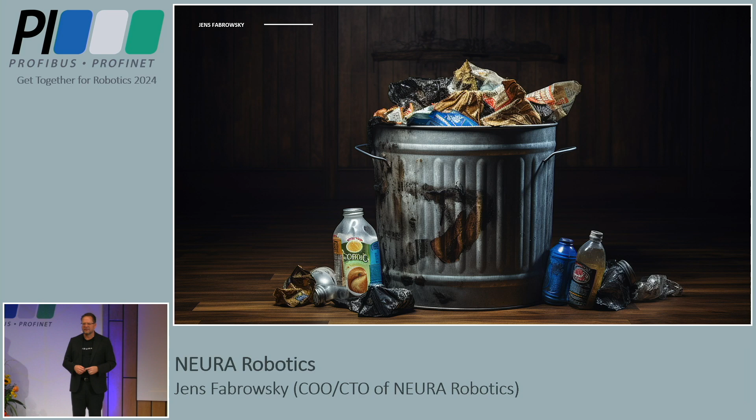So, nevertheless, always in the evening I also have another task at home. You might know this: I have to bring out the garbage. Have you ever asked ChatGPT to bring out the garbage? What do you think happens? I'm a bit limited in time, so I don't ask it live, I have a slide. ChatGPT can't do physical stuff. You might have a funny difference between German and English. If you ask in German, you get below that an explanation on how to separate the garbage. In English, it just ends there.

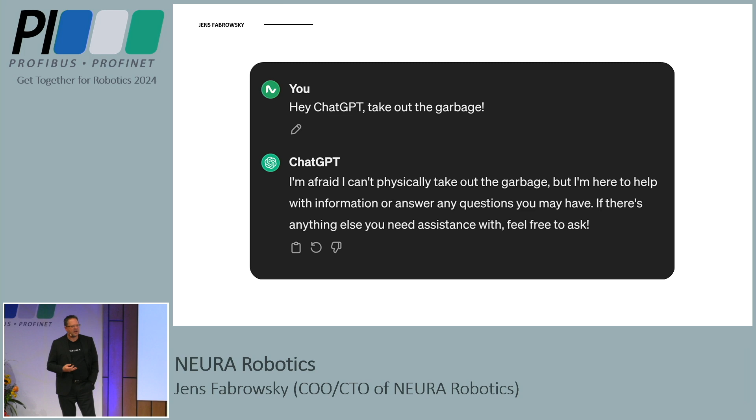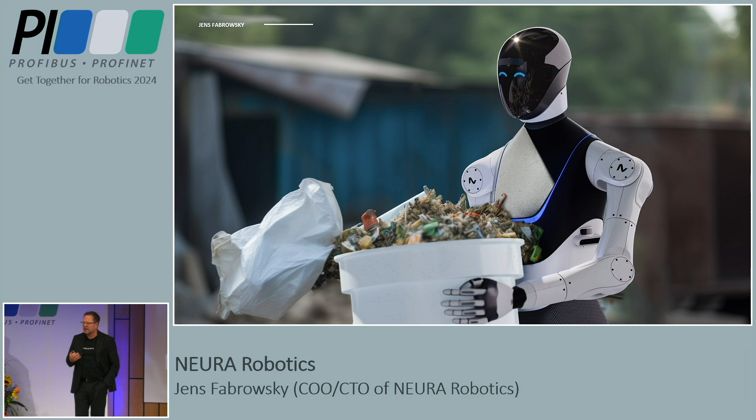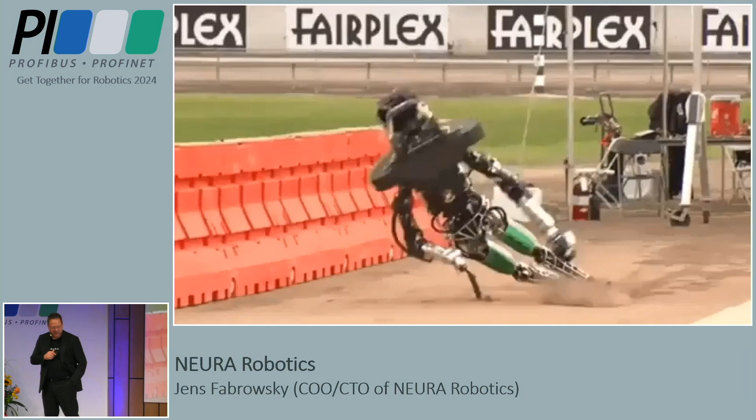So the vision is, of course, we can do things that we all don't like to do, or where it supports us to do stuff. But it's not working so super yet. I can probably watch these YouTube videos for hours.

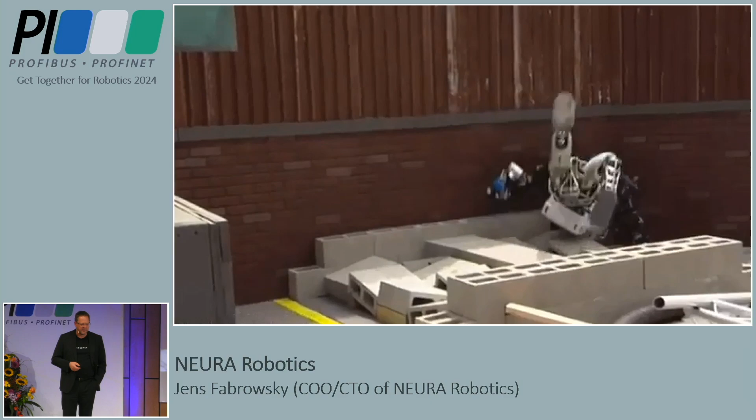Still some meters to go to get these humanoids really around us. You see a lot of videos where things can do something, but if you're in real life, well, it's difficult. Nevertheless, it will happen for sure, and it will change our world.

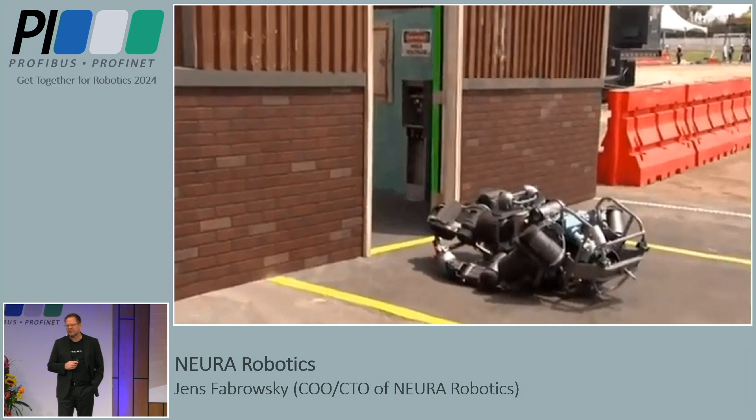And we all know Elon Musk. He's always quite a bit early on what comes next and what is the next big thing. He's even stating a vision that Tesla will become a 25 trillion dollar company, just because of robots. And if you compare it, that would be half of the value of the S&P 500, just by moving a company into a field that for this company is technically reachable.

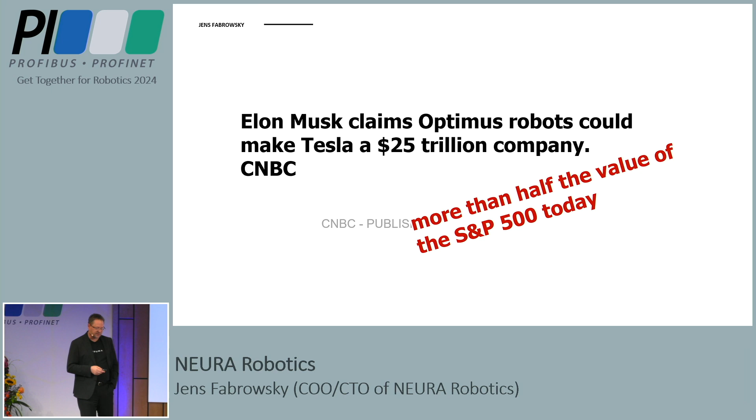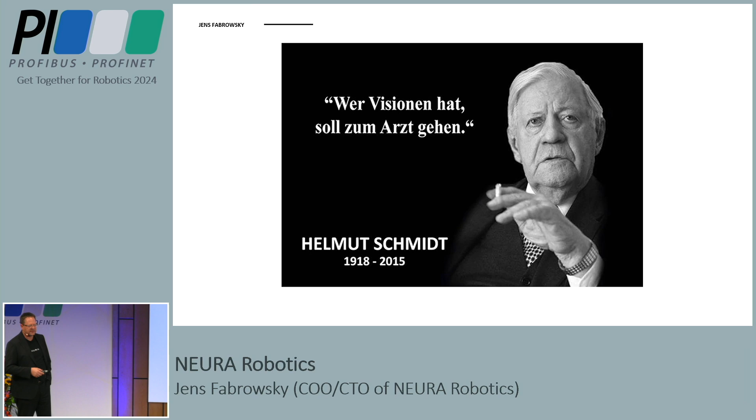So, but visions - for us as Germans, it's always a bit difficult. Probably most of you know this quote. I don't have the English translation, but it basically says who has a vision should go see a doctor. But we have to have visions, otherwise we will end up somewhere in a museum. The world around us changes, and we are a bit slow and a bit late.

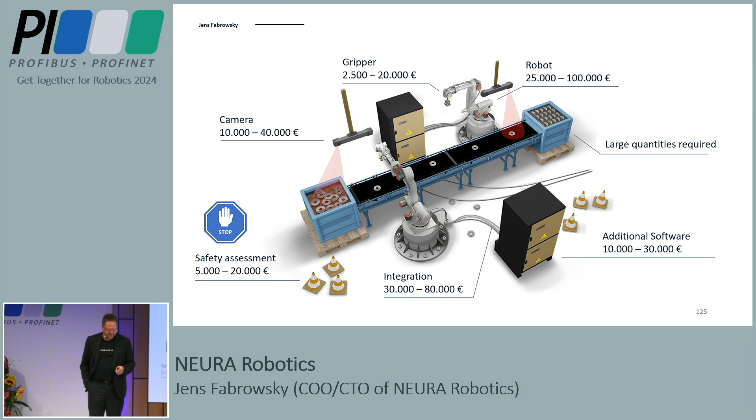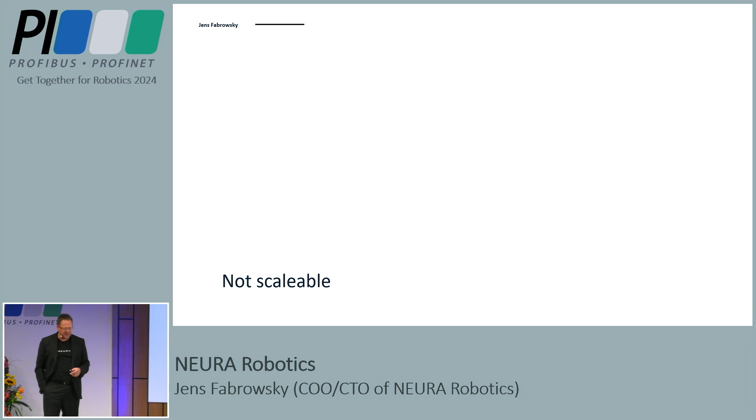Is it the smartest solution? Well, not really. It's not really scalable. We all know these challenges on vision - lighting has to be somehow always the same. Is it cost efficient? Also not really. It needs skilled workers, at least for programming. It's not really safe in the environment. It's not flexible, it's complex. So it's not fully autonomous.

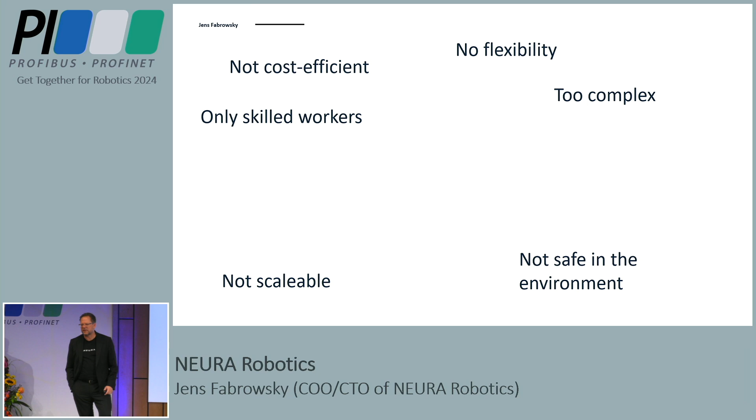So if you remove the box on the left-hand side and put something else there, same task, do it from unsorted to sorted - doesn't work. We need to put our hand to it. So it's not fully autonomous.

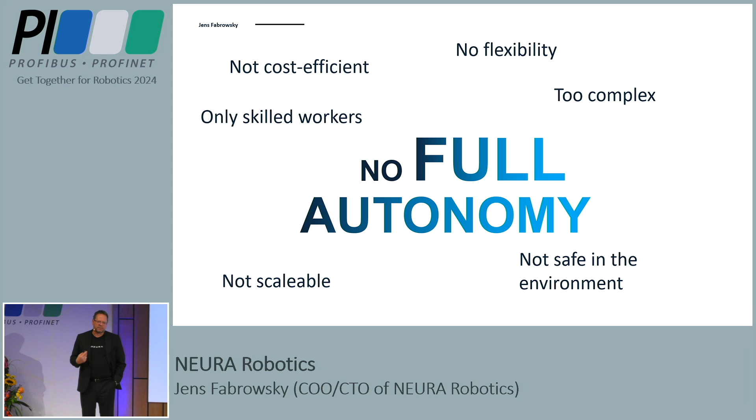What do we bring to the robot? What is, let's say, the secret of Neura? The secret of Neura is something to bring cognitive skills to a robot. Something we all know - we know it at least from our own childhood, but we know it also from our kids. We perceive the environment, we understand something, we start an intuitive and safe action, and we don't do this again, or we do it again depending on what we have learned.

What is the best example? Every kid probably has to touch the oven once to find out, damn, this is hot. This makes I don't do this again. Loop is closed. If you do this to a robot, then you can do a lot of stuff.

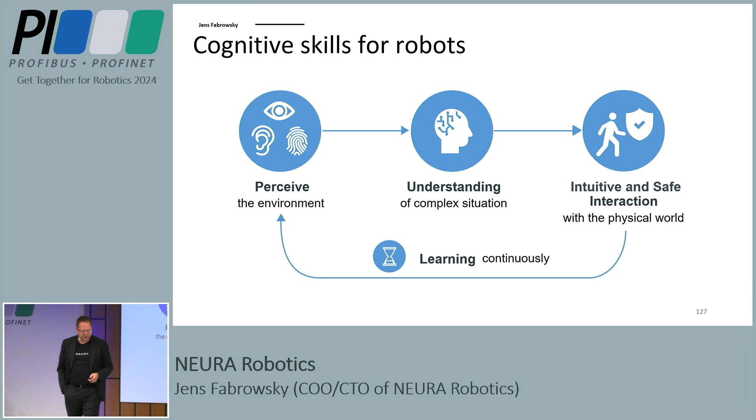That is what we have in our portfolio. This is what we call our MAiRA. It's the first cognitive robot in the world. What did we bring to it? We brought sensors to it, we brought eyes, a 3D camera.

We brought ears, a 360 degree microphone array. And we brought feeling to it with force torque sensors and some other secrets that we do to it, so you can do stuff like a human being. I will show you in a video.

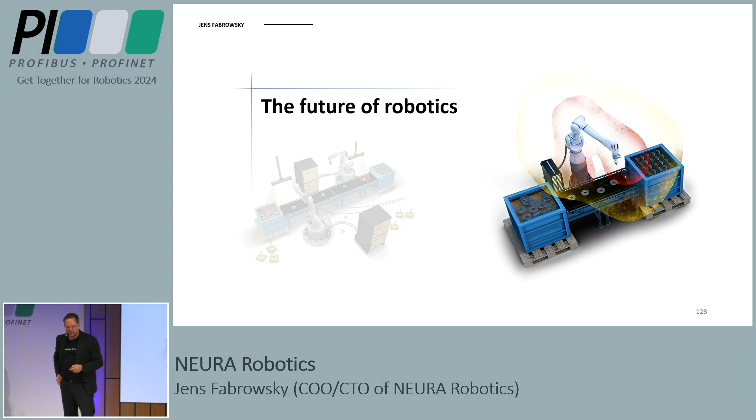And if you do this in a logical row, you get a portfolio of things that happen in a physically, absolutely logical way - like an evolution, but the evolution is way faster than from this wooden wheel to the Porsche, because it's already happening in our portfolio.

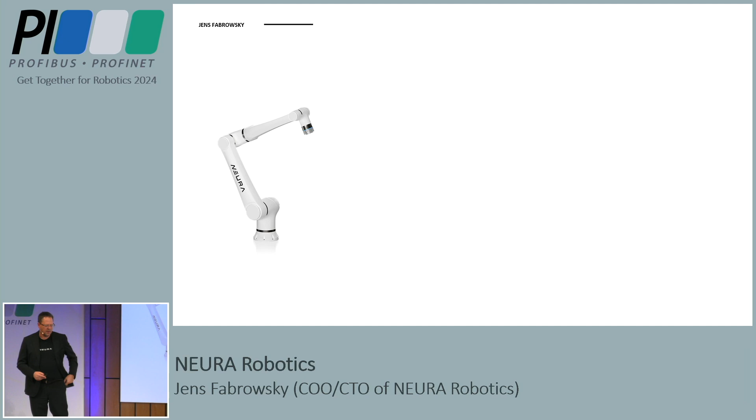So on the left-hand side, you see our Lara. It's a typical collaborative robot, and then I put some sensors to it, and it becomes a cognitive robot. That's our MAiRA, having a camera, having the 360 degree microphone array, having the force torque sensor, having some human detection to it. So you find out now, wow, I can sense something and I can do something, and it has AI on the edge, not in the cloud - on the edge.

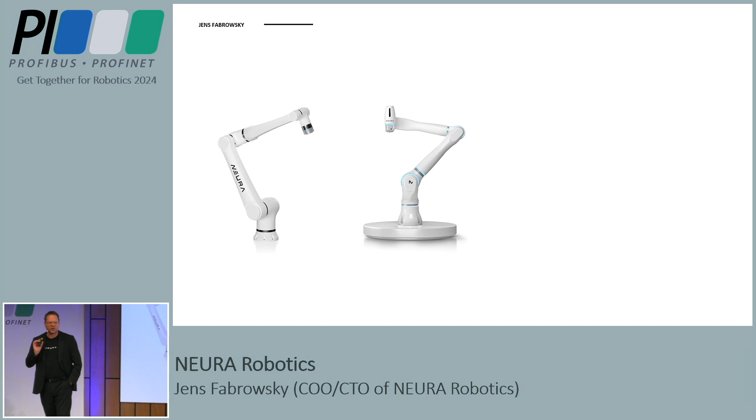Now I put some wheels below that, and then you would say, wow, it's a shelf on wheels. What can I do with that? Of course, you can go where the task is. You can then do the stuff there, so the robot can already move to the task.

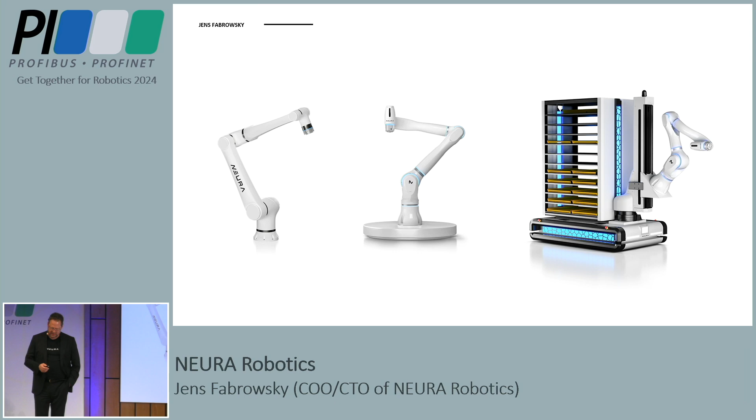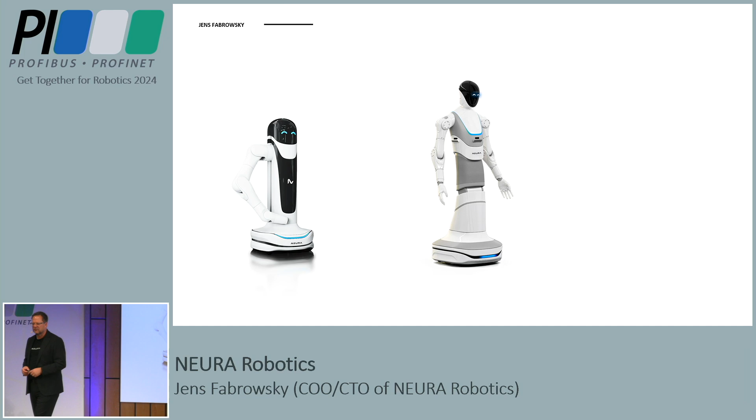Giving it a little bit of a different shape, it's still the same rolling platform. If you look at the arm, it's still something that looks like an industrial arm, and you put the sensors somehow in a body that looks a little bit more like a human being. You're coming closer to what could be a humanoid. Well, this is just above the waist, the humanoid. Below it's still the same, and then you finally end up at our 4NE-1 - that's our humanoid robot, which makes us the first manufacturer of a humanoid robot in the world, in Germany, sorry.

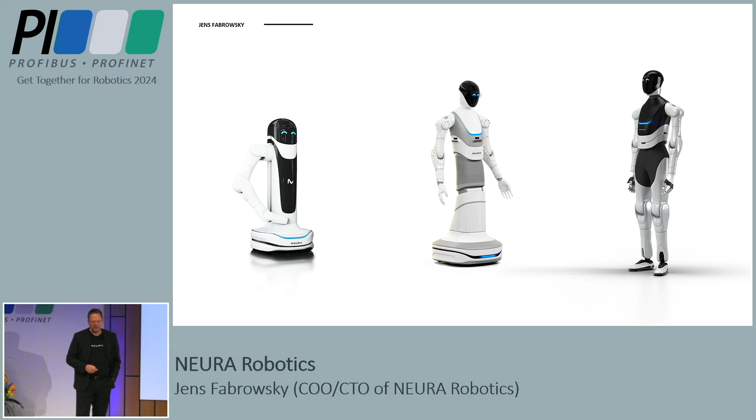Well, I was flipping pretty fast through our portfolio. We are a 5-year-old company and we have a portfolio like this. That's not typical for a startup. Why is it? Because it's all platform-based. If you look into our drives, our secret, you would find out that somehow they look equal.

Well, it's a toolbox of drives. If you look into the combinations in the platform, you would find out it's just a clever combination of stuff where you put intelligence, where you put wheels on the intelligence, and you can do things to it. And there's some other thing to it - I mean, guess what, you all have such a smartphone.

The ones in this group that are a little bit older know that before that smartphone, there were other smartphones. They were not so bad, but they all had one big issue: there was no open technology platform. At the time, you could buy a Palm that was talking perfectly to your Microsoft computer. Unfortunately, you couldn't buy an app, or it was horribly expensive.

So what was the magic to that? Technology platform with an app. That's basically the same that we have. We have a technology platform. Each and everything is basically working on the same software architecture, having a safety layer, having a layer in the middle that basically keeps us somehow communicating with the software that should do something, and on top we have apps. And guess what, you can transfer that from one robot to the other, and it learns by itself.

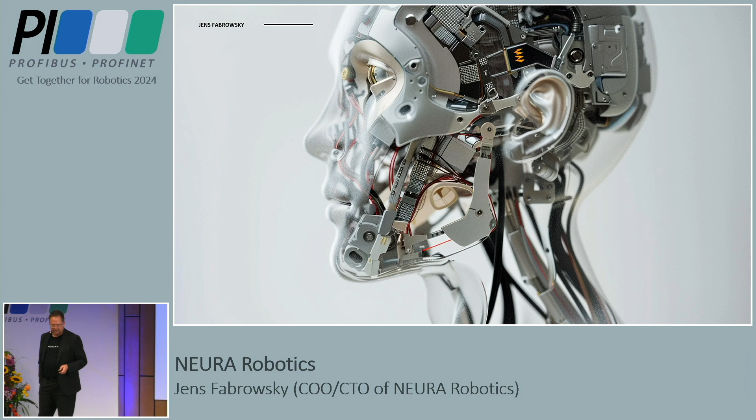That brings us a bit more to humanity. Well, let's look into one short movie just to have a bit of an overview.

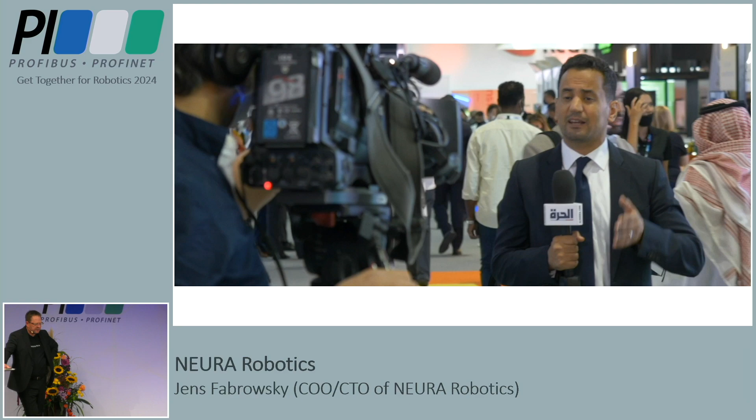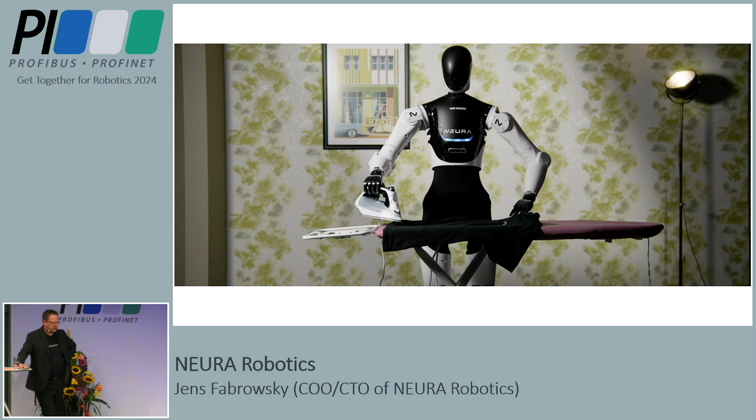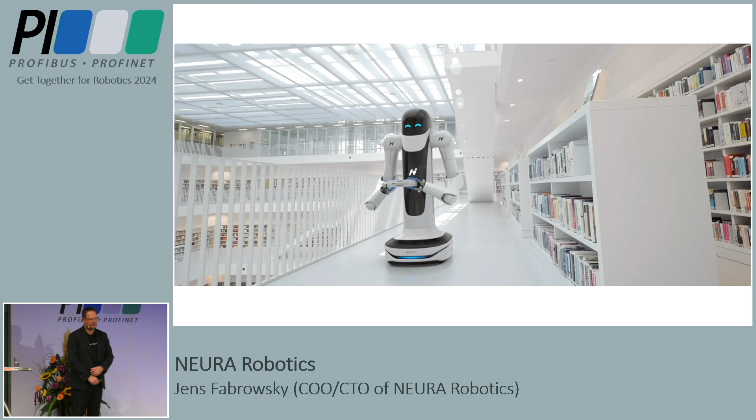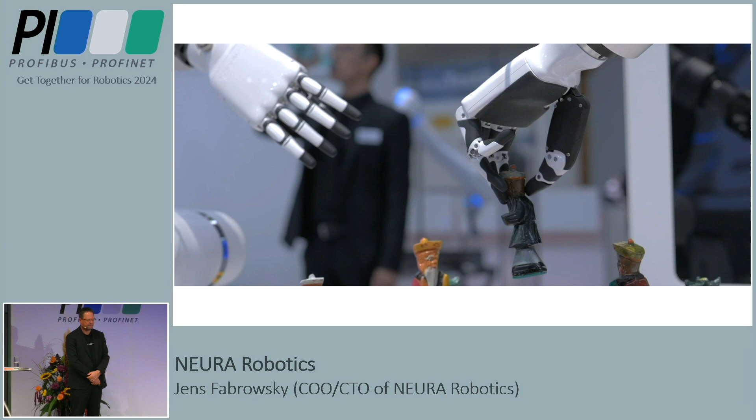We are here to create the future, a good future, where our technologies assist humans. My great vision is making robots being an accessory for every human, in every home, in everyday's lives. Are you ready? All the last big things were actually created by a need. Our aim is to bring our technology together with their solutions to create even better solutions for mankind. The goal of Neura is what a company brings to the world, the impact. Being more like a technology provider, platform provider for every company in the world one day. Just giving the next step to advance humanity, that's, I think, one of the biggest goals.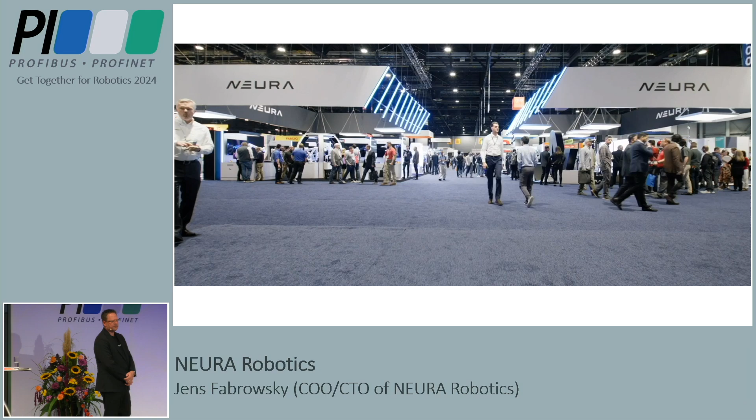So now, I mean, you were obviously talking a lot about robots. Let me talk a little bit about humanoids and why it works, and why it will work easy and fast.

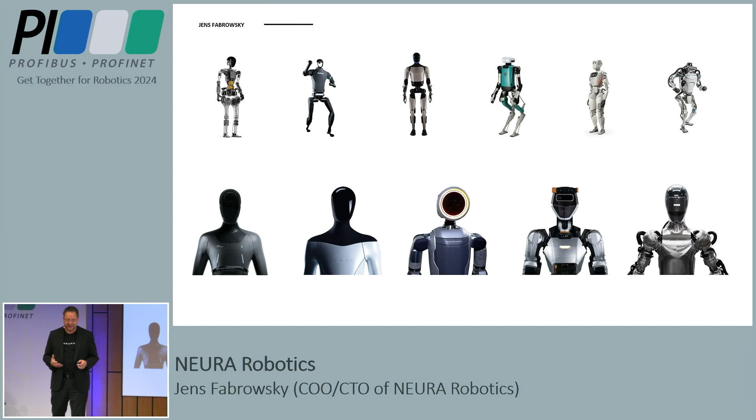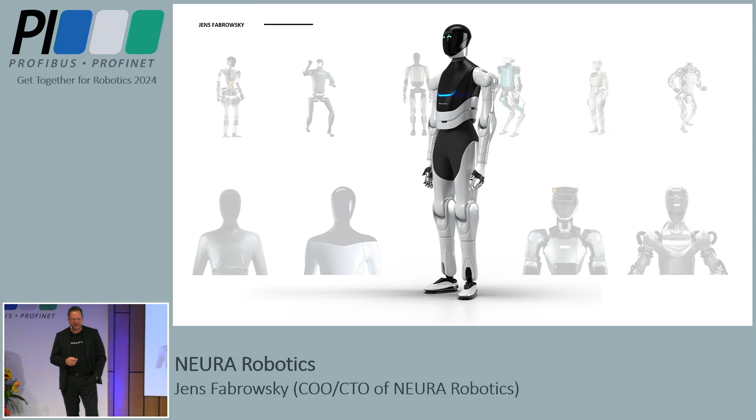Well, we talk about our 4NE-1. 4NE-1 is our platform on humanoid robots. Of course, it looks like this, this is basically the one that we are having at the current status in manufacturing. And it can do things, and that's the idea. It can do things that relieve you from timely tasks, to give you a bit more time to do other stuff. But now let's do the transfer.

Let's do the transfer from why we learn with each and every pick, each and every task that we do with an industrial robot, into a humanoid.

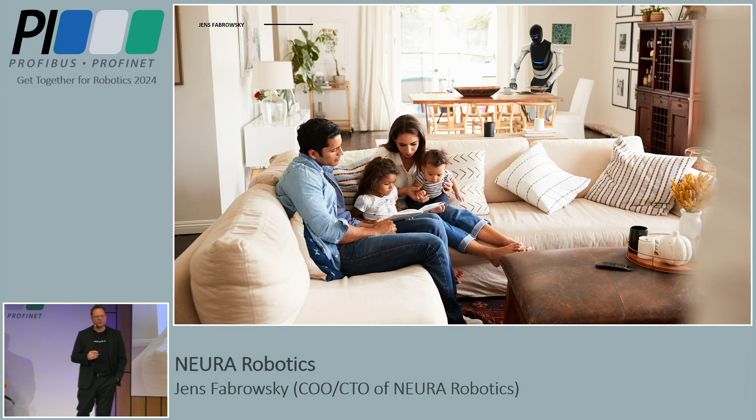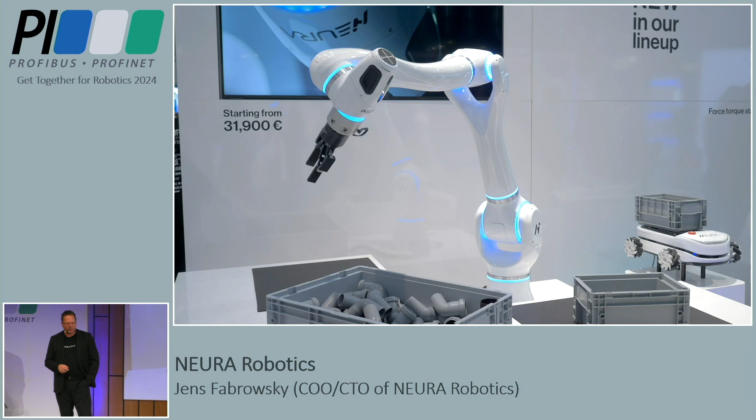Simple task: empty the bin. That's basically the command that MAiRA gets. It's not a program that we program. We have a wizard, where we show where the bin is. We have a camera, the robot looks at it, it observes the scene, it checks on it, and the task is empty the bin. And then it does, by AI, checking on what object should I grab, which is the best one - so better not the one that is very low. I take one from the top, and I take it into one of the bins that we basically position there. So empty the bin, no program. That's what you get.

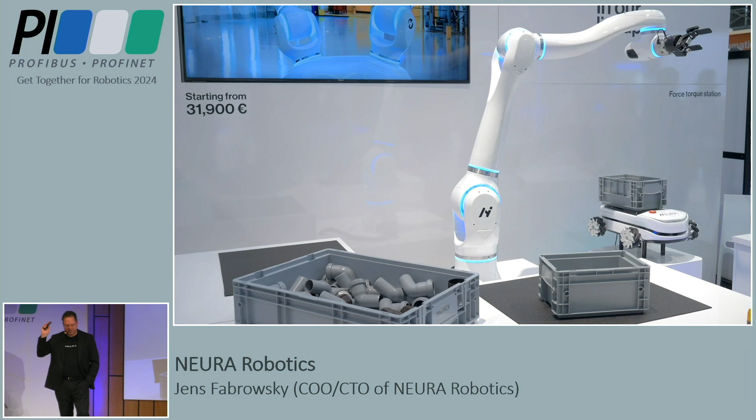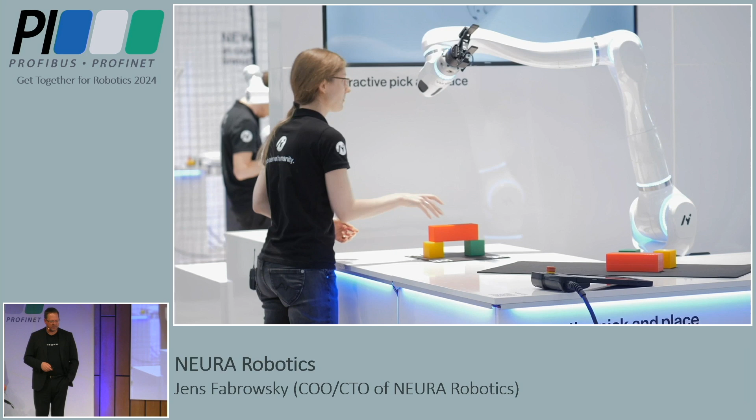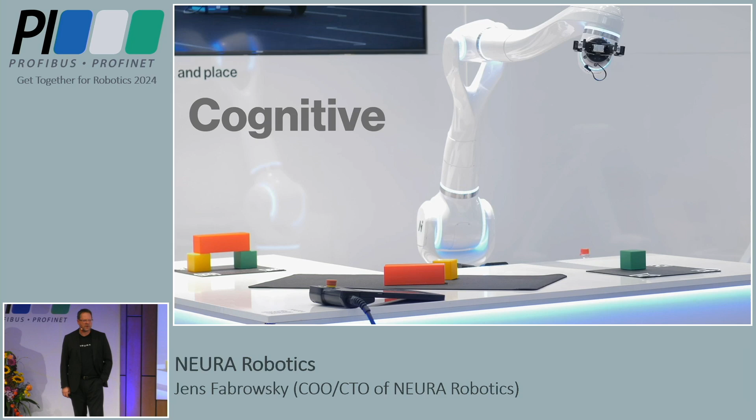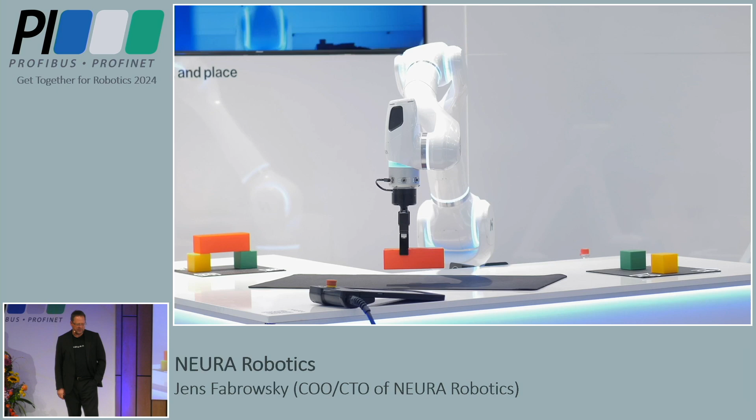It's running a little bit faster than normal, so it looks, it picks, it looks, it picks. Just imagine. Next one. I don't know whether we have sound - no, we don't. So she talks to MAiRA and says, I have finished. And behind the command 'I have finished' is rebuild it again. So what you see is MAiRA does some movements, checks on objects that are around, and then picks and wanders the right color to the right spot, puts it in place, and puts it on top. So if you would measure it, it's exact to the tenths, because it's not just looking, it's measuring - it's information you get for free when you look at something, you can use it.

Now let's look into the humanoid. Remember, it's the same software platform, it's the same idea behind it. Let's look into the humanoid. What can the humanoid do?

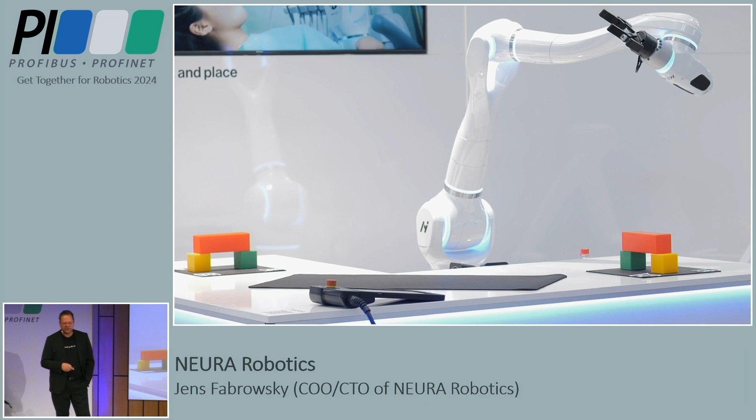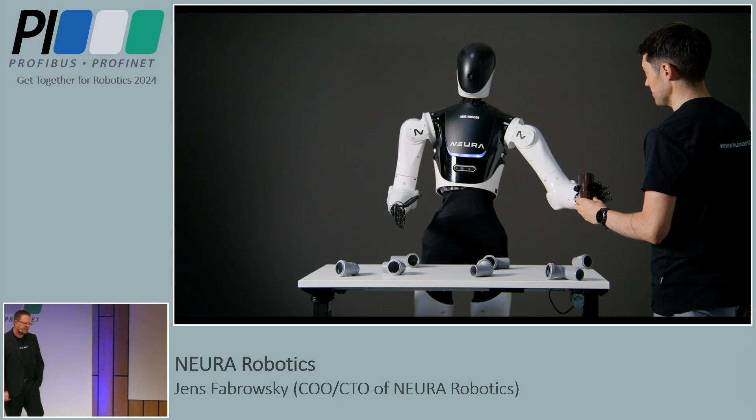Can you grab the object like this? I understand, I grab the object as you have shown. Thank you. 4NE-1, can you grab the object like this? So what do you see? It needs to have it somewhere in front of the camera, it needs to visualize it. The program comes by itself. And the other thing you can see is it's exactly the same doing as what we did with the gray pipes, but it's not moving that smoothly.

Why? It's a simple question of how good we already are in controlling these 29 joints that we have somewhere in 4NE-1. This is still a huge task and still gives us some headaches, so it's not too perfect. The second thing you observed, of course, is it was not walking, so it's above the waist. We transferred the movements of the industrial arm, with the app of grab something and look how to grab it, into the humanoid hand to do this. Again, the same idea.

You remember the 3 colored pieces? In front of me, I see 2 blue blocks and 1 red block on a table. What do you see now? I see 1 blue block on top of a red and a blue block. Can you rebuild it? Yes, sure.

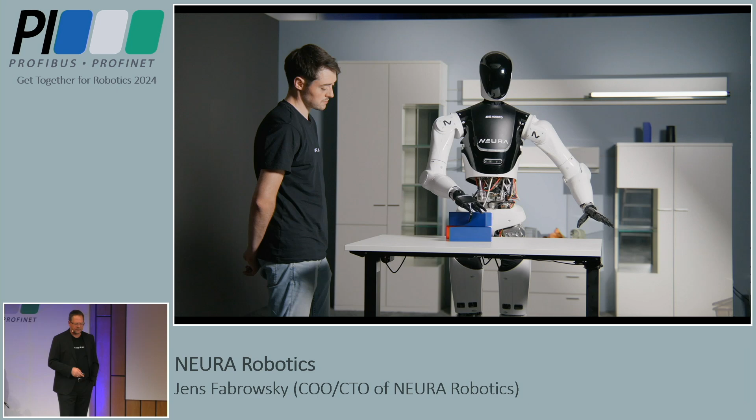Same task as before: rebuild what you have seen. Again, the little trick you saw, we had to move one object to the second hand. It's not about having full control on what you do with which hand. A humanoid robot is neither right-handed nor left-handed, which we normally are. We have a preference. A humanoid robot does not.

That's the task to be solved. Again, looking at the portfolio, that's how we transfer things from A to B. That's why we're absolutely sure humanoids will happen around us, and faster than we really think. You can derive it from a portfolio coming from a collaborative to a cognitive cobot, combined with a platform that moves into a world that really supports us.

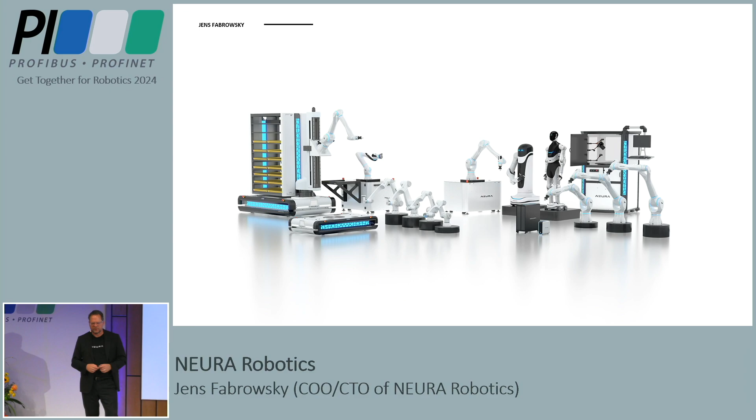So much from my side. Thank you very much.

Thank you very much, I surprised you by being 15 seconds faster. Perfect, bang on time. That was very fascinating. I did enjoy that video of the bots just falling over as if they were drunk. Do we have any questions at all for Jens?

Yes, Wolfgang. One question about the humanoid robot: is there already a date for launching, or an idea what the pricing would be for such a humanoid robot for the household?

Let's talk about two versions. One is the smaller one, we call it MIPA, My Intelligent Personal Assistant, on wheels with one or two arms. First, the price point: the idea is to bring it to the point where your wife tells you, 'Don't buy the new e-bike, buy me a MIPA.' So it must be priced somewhere around something we'd normally spend money on in the household. We will have our launch for that next year.

If you go a bit bigger and talk about '4NE-1', I'd be a bit shy on saying the price point. Launch is somewhere end of next year, beginning of '26. And the price point? It was worth a try.